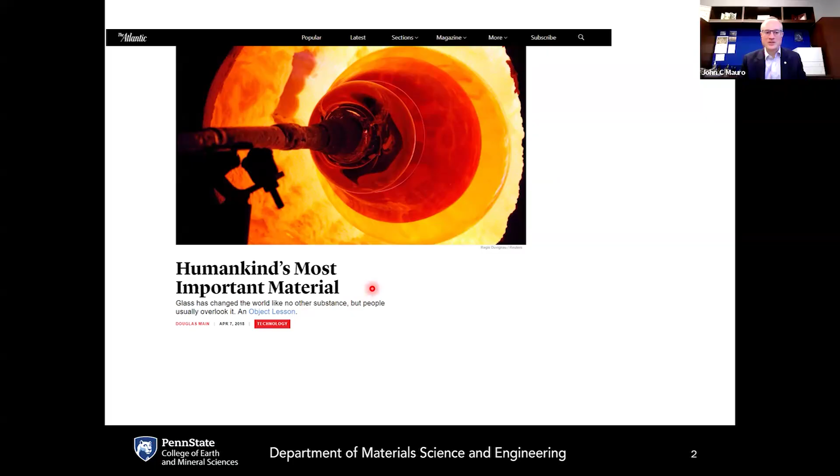Glass is often a material we don't think too much about because it's something we look through rather than look at. I was delighted a few years ago, in 2015, when The Atlantic published an article calling glass humankind's most important material, saying glass has changed the world like no other substance, but people usually overlook it. More recently, in 2024, the cover of National Geographic declared this the glass age, making the case for how cutting-edge glass technology is helping reshape this ancient material for our future. People tend to think of glass as an old material because it's been made for thousands of years.

But if you look at the glass around you and see all the ways it has helped facilitate modern civilization, there are so many aspects of glass that touch our lives every day. One of the most basic is glass windows for architecture, whether homes or office buildings. This material lets in outside light while providing a good thermal barrier between inside and outside, along with good corrosion resistance against water and acid rain, doing this cheaply and over many decades without issues.

There are also glass lenses invented hundreds of years ago. Most of us wear corrective lenses of some sort, and glass technology was key to making that possible. There are also glass lenses used in tools of scientific discovery. Before glass lenses for telescopes, astronomy was done by the naked eye, and telescopes made possible by glass technology were a huge step forward for the entire field. Glass lenses for microscopes were essential for microbiology and the discovery of microorganisms, revealing a whole world of unicellular life responsible for diseases, enabling the whole field of epidemiology. This was all made possible by glass.

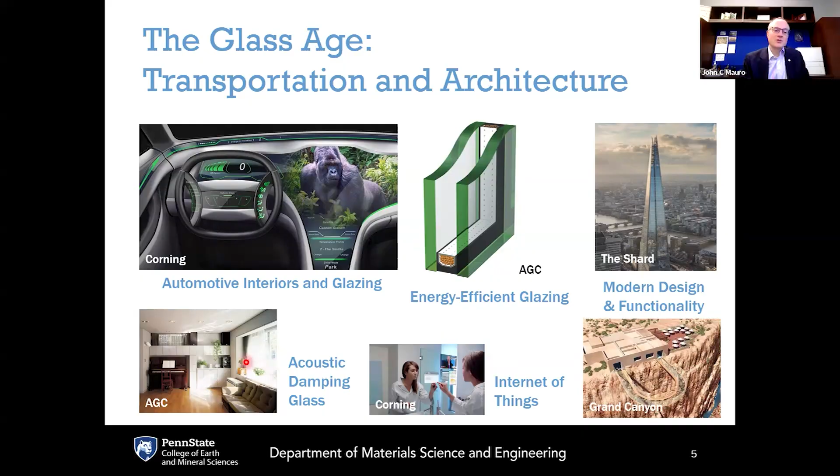There's also new glass technologies being used for modern design and functionality, whether it is the Shard in London, this glass bridge you can walk over the Grand Canyon if you are brave enough, glasses being used to help enable internet connectivity in devices and appliances around your house, and also acoustic damping glasses to help attenuate sound. When it comes to energy, glass plays a really key role in enabling the next generation of renewable energy.

Windmill turbines become more efficient with larger turbines, and these are fiberglass reinforced composites. So in order to enable more efficient wind energy generation, new generations of fiberglass need to be developed with higher values of Young's modulus to get higher stiffnesses to enable these larger turbines. Companies like Owens Corning are investing a lot in these next generation fiberglass technologies for wind energy.

Then there is solar energy generation. Glasses are used as substrates for photovoltaics. We just installed a bunch of panels on our house, so we're making good use of those as well. There's also glass technologies for solar thermal energy, where you've got parabolic mirrors that focus light on a glass tube that has a polymer inside that converts to a liquid when heated up from the solar radiation. This converts solar energy into thermal energy and then into electricity.

Then there's also glass tubing that is used for photobioreactors, where we take advantage of the natural photosynthesis process to convert solar energy into chemical energy. So there's all kinds of ways that glass is helping to enable this next generation of clean energy generation.

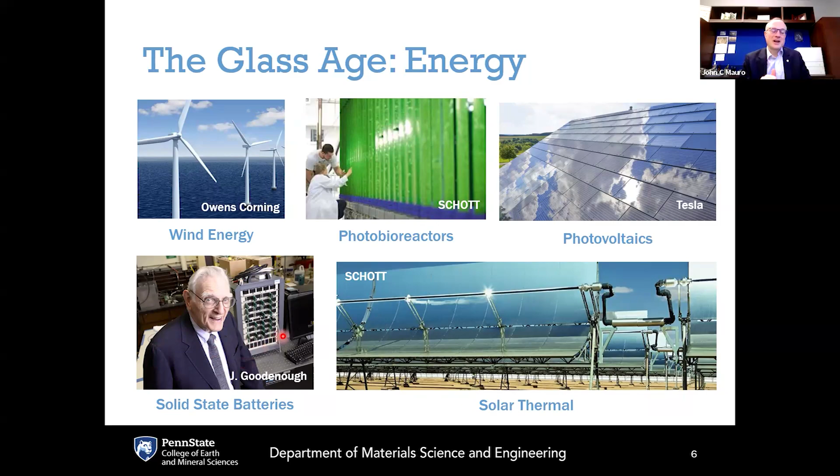Glasses are also used for energy storage. John Goodenough, who unfortunately passed away recently, was very active in the lab up until his final year, and he was inventing new glass-based technologies for next generation batteries that would go beyond his Nobel Prize winning invention and offer higher density energy storage, safer energy storage, and greater cyclability.

Then there's glasses for healthcare. Glasses are used for vaccines, and for medicines, like the EpiPen, from a company my advisor has. Out of Alfred University, he's got a company that does ion exchange strengthening of glass, and this is used for patients who have bee allergies or other allergies. This glass needs to be able to withstand high stresses, so patients can inject themselves with life-saving medicine if needed.

Then there are glasses that have silver ion exchange into the surfaces, and silver is a known antimicrobial agent, and this helps to prevent the spread of diseases, like if you've got shared touch screens used in hospitals or ATMs. And then there are bioactive glasses that actually get embedded in the body.

Some of the early bioactive glasses developed by Larry Hench and then Mohammed Rahaman are used for helping to stimulate natural bone tissue repair and tooth repair. More recently, Steve Jung and Delbert Day, who's also a Penn State grad and now at Missouri, have developed glass fibers being used to help enable soft tissue repair.

This is useful especially for diabetic patients, many of whom have open ulcers that just do not heal for many months, and these ulcers can be as deep as going down to the bone. With this new glass fiber technology, these glass fibers get packed into the ulcers, and they dissolve over the course of a few days.

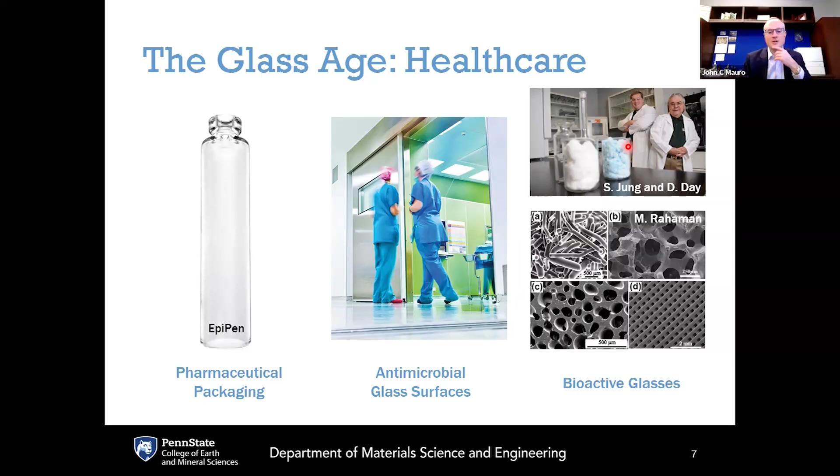Now, as scientists and engineers, we tend to think about materials in terms of what useful things they can do for us from an engineering perspective. It's often easy and unfortunate to overlook the impact they have on our society through their culture and through their use as an artistic medium.

Glass has been a favorite artistic medium for humankind for thousands of years, dating back to glass beads in Egypt and Mesopotamia. What we're looking at here are the beautiful, famous stained glass windows from Sainte-Chapelle in Paris. These are about 800 years old, and glass was chosen by King Louis, better known now as Saint Louis, as the medium for building this beautiful chapel meant to house the crown of thorns from Jesus.

King Louis had purchased the crown of thorns from the Eastern Roman Empire in Constantinople when they were in trouble, and transferred it to France, then built this chapel to house it. Each one of these beautiful stained glass windows tells a very detailed story from one of the books of the Bible. If you go inside Sainte-Chapelle, it's like being inside this beautiful work of art with so much detail, so much color, and the natural sunlight coming in just has this wonderful effect.

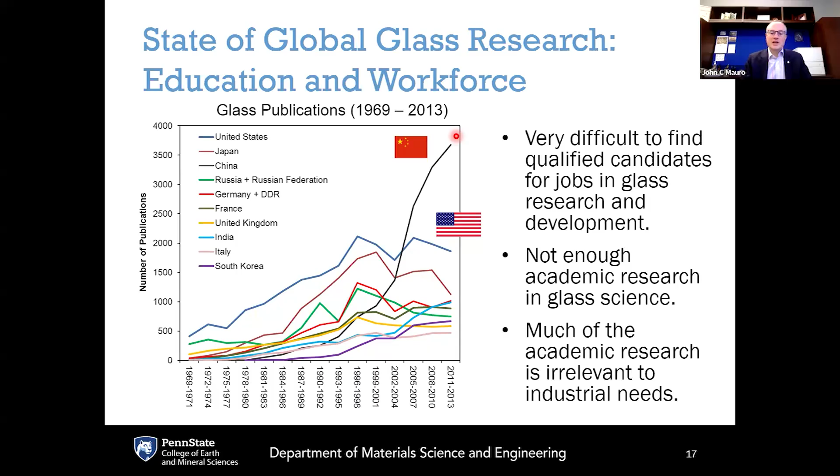Then one day I found out that Carlo Pantano, the glass professor here at Penn State, was retiring. My now former boss at Corning told me I took the problem a little bit too seriously when I quit my job at Corning and came here to Penn State to be the next glass professor.

So I've been here now for 9 years, and it has been a wonderful move. We've just found the perfect place really to do glass science, and just a wonderful community at all levels, whether it's the department, the college, the university, or the Happy Valley community.

This young lady here, Sophia, she was 11 when we moved, and she is now a second year student at Penn State doing a triple degree. She's majoring in material science and engineering, English, and music.

We very quickly built the largest academic glass group at Penn State. I made the case that there's a really strong demand for research in glass that is being unmet by the supply at US universities, and I turned out to be right. So I was able to very quickly build up the largest program here in the country in glass science.

What was really satisfying for me is two of my PhD graduates actually became professors at my alma mater, Alfred University, and they organized a conference there a couple of summers ago called the University Conference on Glass. I was able to bring a big chunk of my group back to my hometown of Alfred, New York, so they could see my hometown and attend a conference organized by a couple of my alumni.

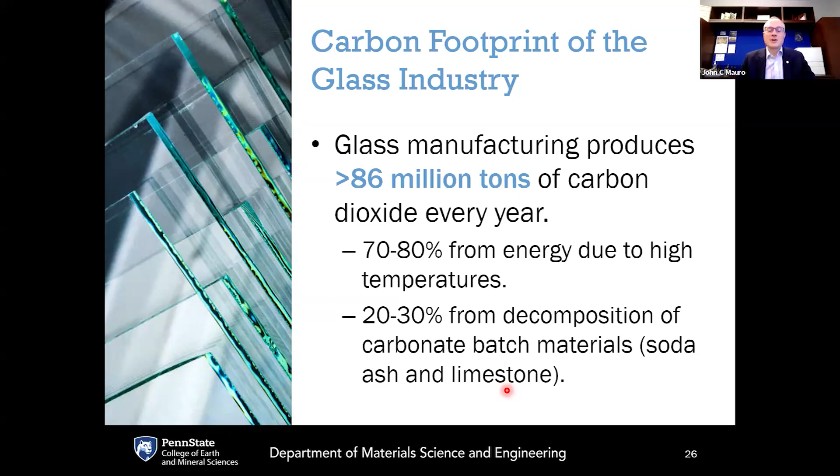So we found ourselves here at Penn State in a rather unique situation, with me having my extensive background in industrial glasses, including commercialization of glasses, also having all the equipment here and students who are eager to make a difference. So we decided to try to take a stab at this problem, and what we came up with is what we're calling Lion Glass. It's called that because it's named after Penn State's mascot, the Nittany Lion. You'll see our Nittany Lion here on the shield in the lower left-hand corner. So that's where the name comes from, plus all the best glasses are named after animals, as we know.

What does Lion Glass do? This is a completely different family of glass chemistry. It's actually a phosphate-based glass instead of a silicate-based glass. It reduces the melting and forming temperatures by about 400 degrees C. It also completely eliminates the use of carbonate batch materials, greatly reducing energy costs and carbon footprint.

The contribution from energy consumption is greatly reduced because of the significantly lower melting temperatures, by about 400 degrees C. Another cool thing is that the strength of the glass, the retained strength after damage, is quite a bit higher.

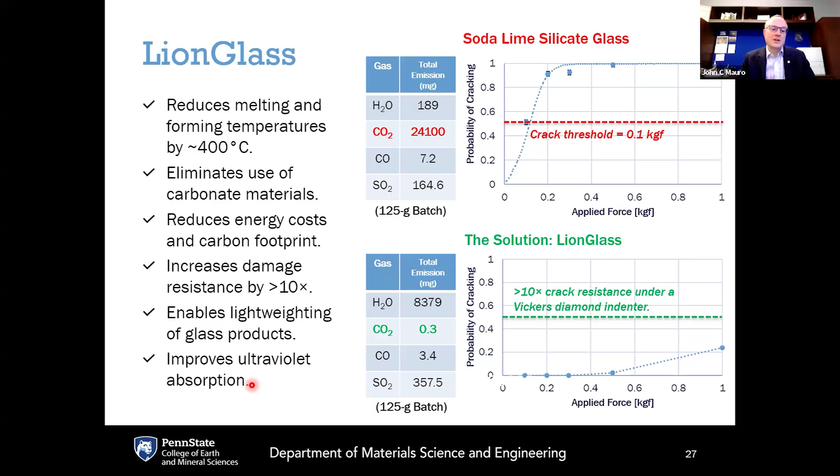One final advantage of Lion Glass is that it shifts the UV absorption edge a little bit towards the visible, so it actually improves ultraviolet absorption. If you're using the glass for packaging anything sensitive to UV degradation, like cosmetics or some beverages, there can be some additional benefit there.

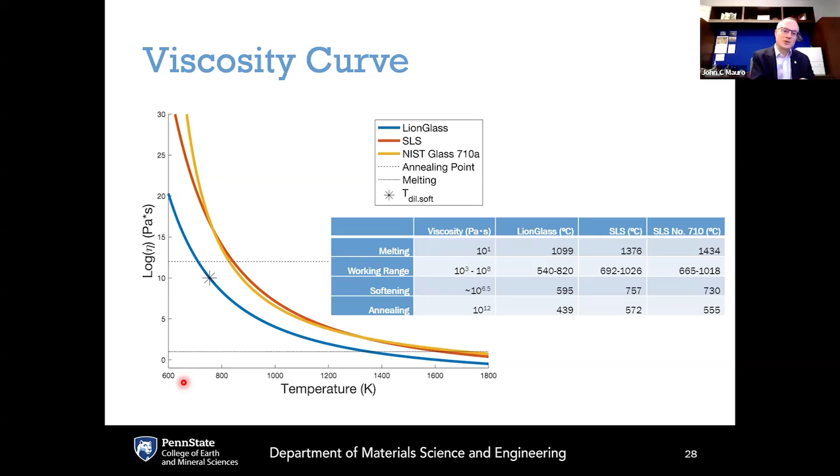Every part of industrial glass manufacturing is not really controlled by temperature, it's controlled by viscosity—how fast the molten glass is flowing. Every stage of industrial glass manufacturing is controlled by the glass flowing at a particular rate. So in moving from soda lime to Lion Glass, what we want to do is maintain the same viscosities that are used now, but just shift the temperatures lower in order to match the same viscosities.

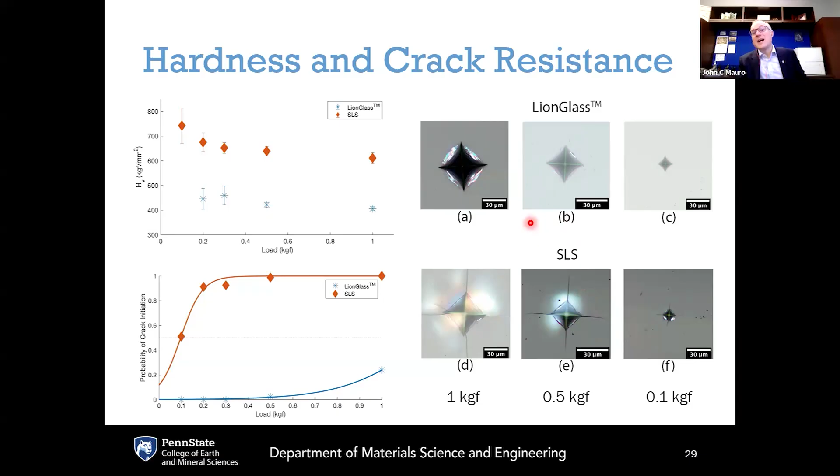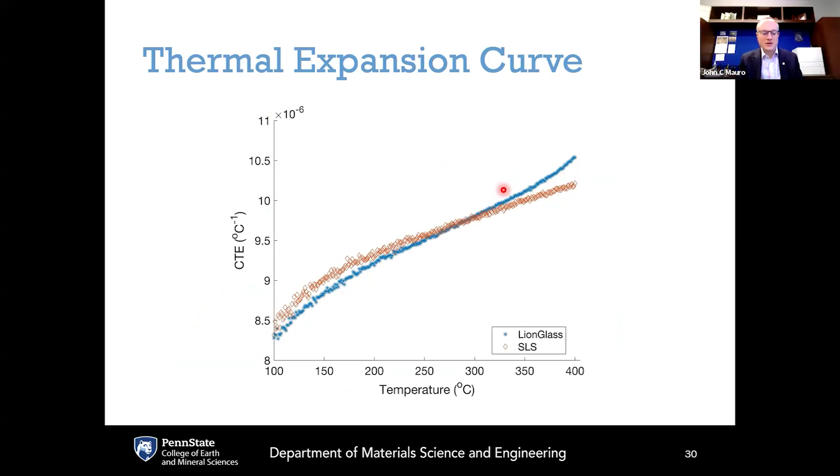What about thermal expansion coefficient? The CTE is actually very similar between Lion Glass and soda lime silicate, so there's no difference in terms of the thermal shock performance.

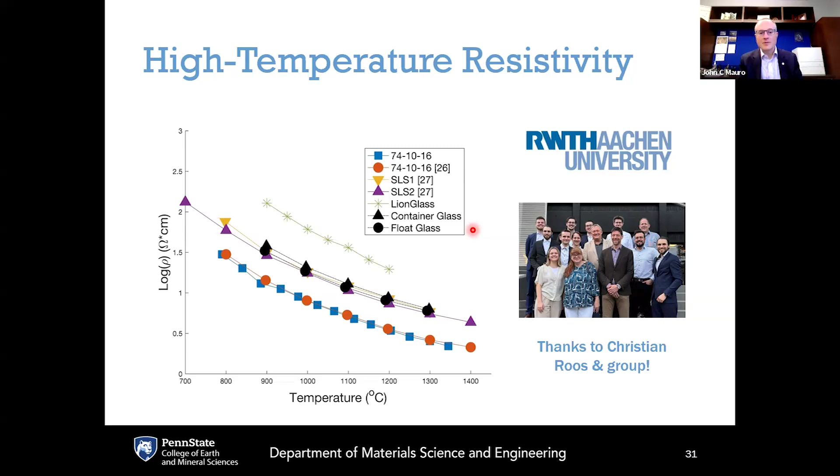Another big trend in glass manufacturing is the move away from fossil fuels and towards electrically resistive glass melters. Working with our collaborators at Aachen University in Germany, we showed that the electrical resistivity, which needs to be in a certain range to enable glass melting, is also in a good space for electrical melting.

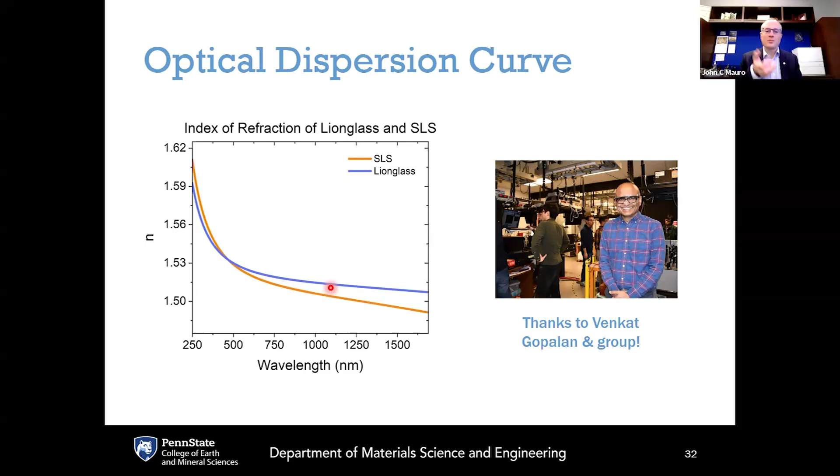What if you just look at Lion Glass—can you tell the difference just by looking at it? The refractive index profile is very similar between Lion Glass and soda lime, so there's no difference there. The one thing you might notice is that Lion Glass is clearer. If you look at soda lime, it's got a little bit of a greenish tint, which comes from iron contamination. With Lion Glass, it's actually a lot more resistant to coloration, so it gives more of a pure, perfectly clear color as opposed to this greenish tint.

They're forming lower melting temperature eutectics. Gases are being released as the carbonates decompose into oxides. And as this ramps up to 1100 degrees C, the reaction kinetics get faster and faster.

The SO2 blisters are just because sodium sulfate is being used as a fining agent. This helps to make larger bubbles so they can get out of the melt faster.

By the time you get to 1400 degrees C, you've got this foaming behavior that starts as the fining agent releases sulfate blisters. You get this foaming, and then as you get to 1500 degrees C, the foam calms down, the fining process is completing, and you get a nice homogeneous melt that is bubble free. But it really does take those high temperatures to make this happen.

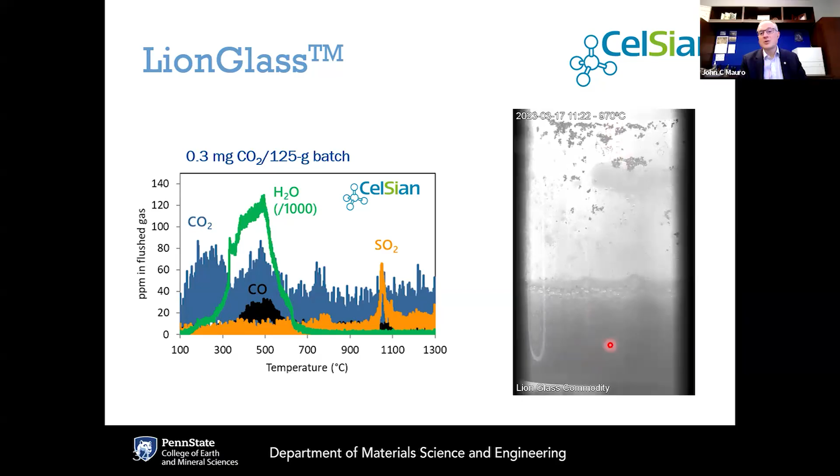As we get to 950 degrees C, everything's calmed down. So 950 is a lot like 1500. You get a nice homogeneous melt here at about 500 degrees less in this particular case.

We've got three industrial partnerships already with LionGlass. It's generated a lot of interest. Our first partner comes from Italy, Bormioli Luigi. They make high-end tableware and also cosmetics packaging. We are in the second year of partnership with them, and they've indicated they would like to continue with us going forward. They are making glasses for cosmetics packaging.

I'm actually learning quite a bit about cosmetics that I never knew before. I never had the need to know. Chanel has told us explicitly that they would like the next generation of Chanel No. 5 to be packaged in LionGlass, so we are doing our best to make this possible.

We had a pilot scale trial, actually a couple of pilot scale trials over in Italy. This first one took place in Murano, and that is very poetic for me, because if you know anything about the history of glass, you know the importance of Venetian glass and the island of Murano. The medieval glassmakers kept burning down Venice, so they were forced onto this island off the coast of Venice, Murano, which is still the center of Venetian glass manufacturing and glass making.

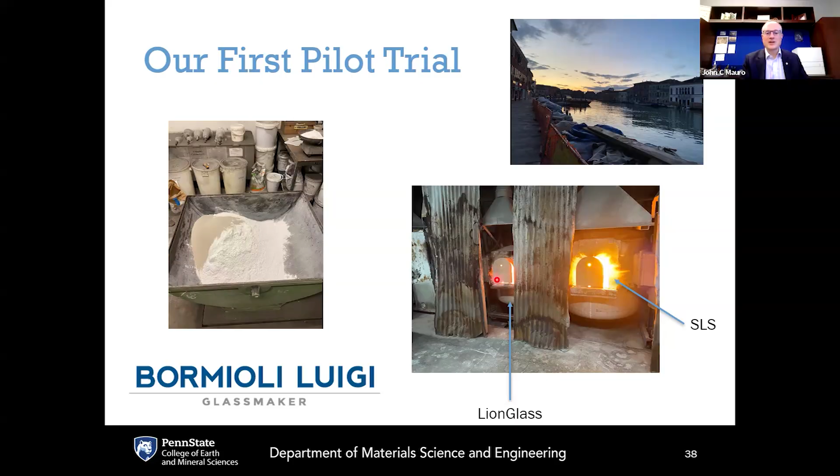So if you go to Venice, make sure you go to Murano so you can check out all the cool glass stuff there. In this trial, you can see the side-by-side furnaces. The furnace on the right is soda lime, the furnace on the left is LionGlass. You can see just what a lower temperature we have with LionGlass.

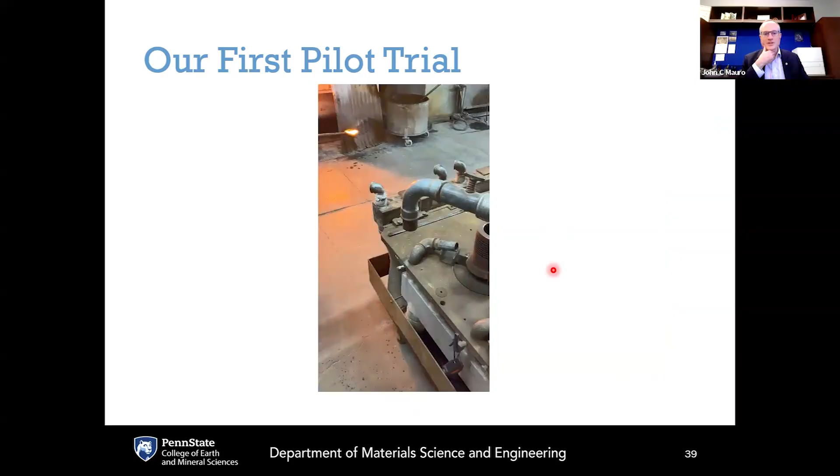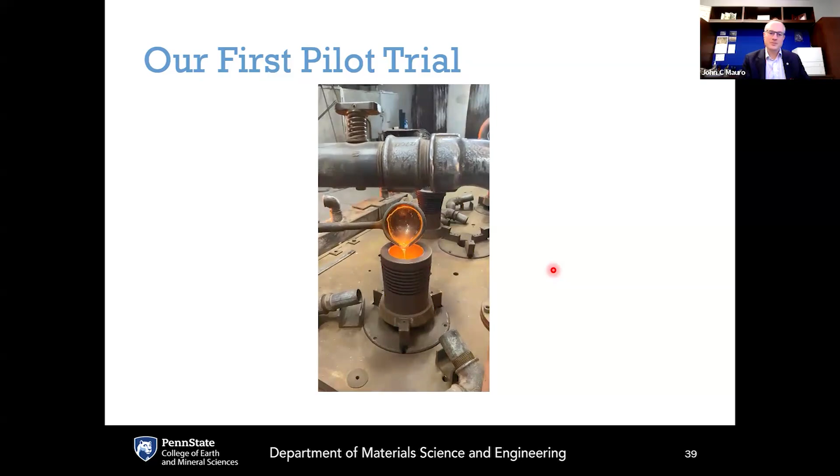This will show a movie of making the first LionGlass cup. We're ladling the molten LionGlass into this mold, and the mold is being spun using a foot pedal. There's a technician there with a foot pedal, and the faster he presses it, the faster it spins around as the molten glass is poured in.

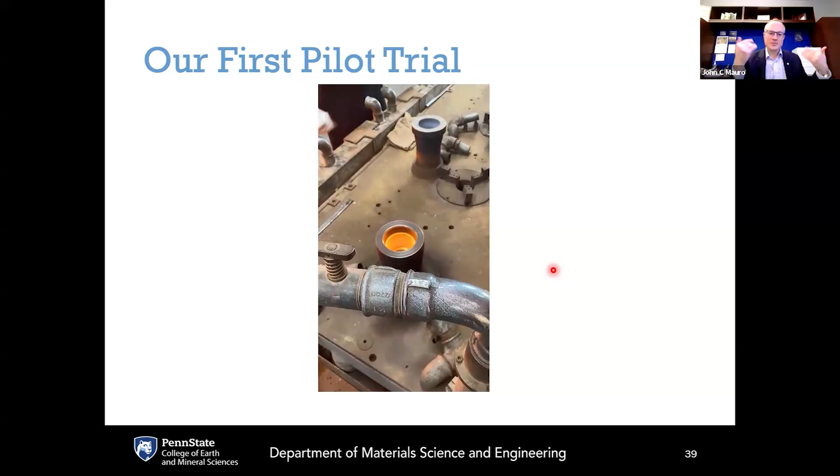As the mold spins faster, the glass creeps up the sides due to centrifugal force. As it creeps up, the temperature goes down, the viscosity goes up, and it's able to retain its shape. Now some cold air is being blown onto it. You can see it cooling down, and it will slow down a bit as it continues to cool. Eventually, once he stops pressing the foot pedal, the mold retracts.

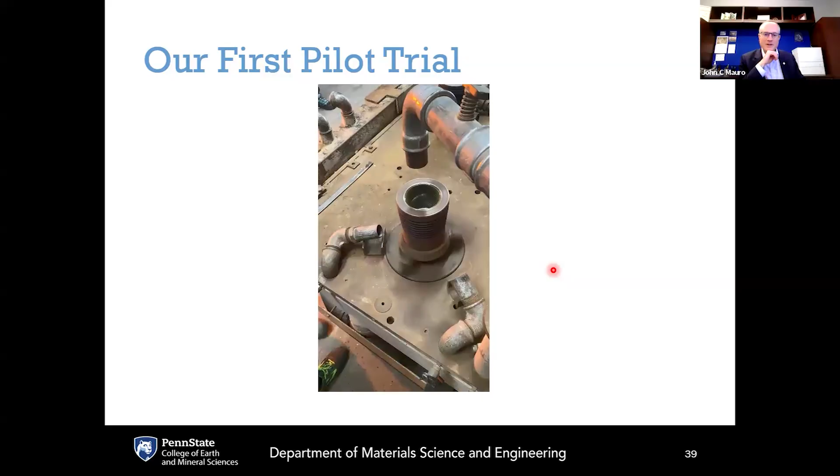So it goes into the plane of the table, and out pops the very first LionGlass cup. And here it comes. Yay, there it is. Here's a close-up of it. We made a whole bunch of cups.

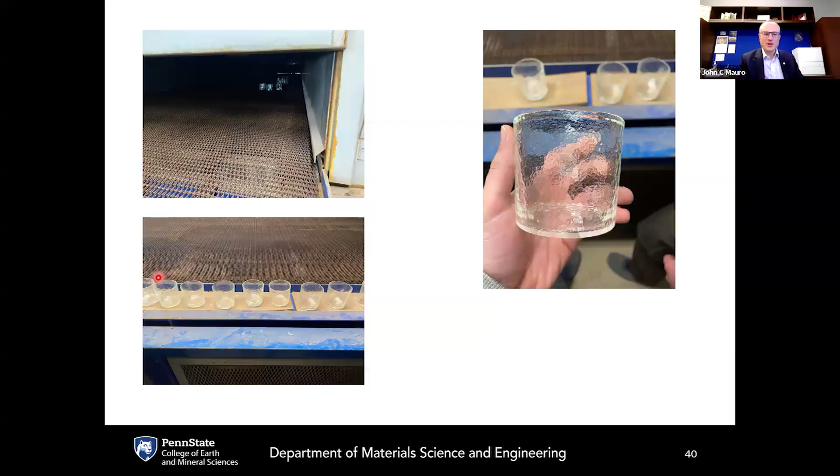Vitro's U.S. headquarters is in Pittsburgh. This is the flat glass part of PPG, Pittsburgh Plate Glass, that was purchased by this Mexican company, Vitro, but we're working with their U.S.-based headquarters in Pittsburgh. This is really cool for a number of reasons. One is that working with a Pittsburgh-based company is in line with Penn State's land grant mission to serve the Commonwealth of Pennsylvania. Also, the student working on this is a former student of Carlo Pantano's who got his bachelor's and master's degree here at Penn State. Now Vitro's sending him back to get his PhD.

The other cool thing is that we're working on the float compatibility of LionGlass for architectural applications - are we able to float molten LionGlass on top of molten tin the same way soda lime is done now, and make these really large sheets of glass for architectural applications? This is the single biggest market for glass, and everything looks pretty promising right now.

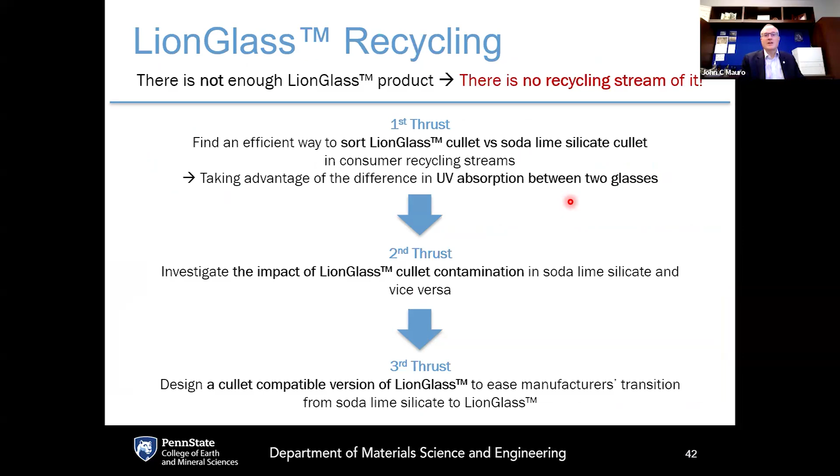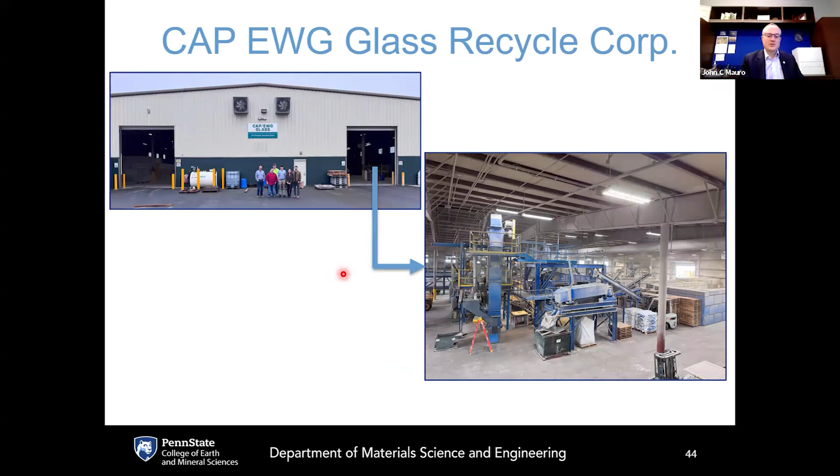One of my students is working together with the Pennsylvania Recycling Markets Center, based at Penn State Harrisburg, and they've connected us with a lot of recycling facilities. My team went to visit recycling facilities around the tri-state area, and what we learned is that there is X-ray fluorescence equipment that is used to sort materials. Here's some of my team at these recycling centers.

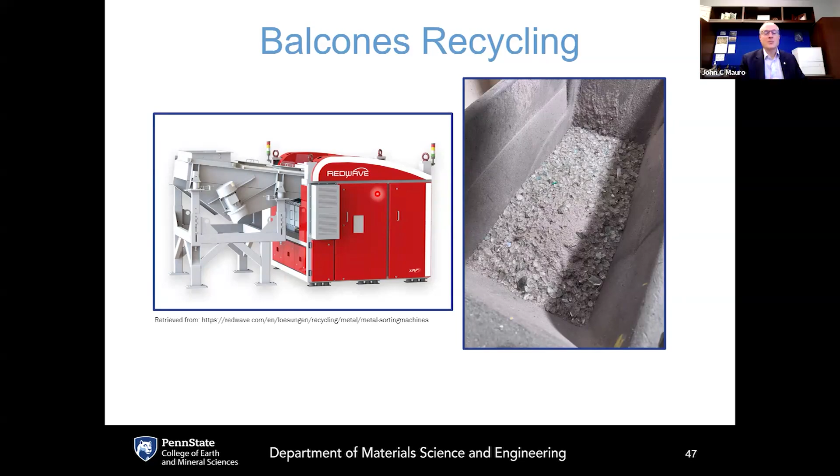Right now it's used to sort out lead silicate, the so-called lead crystal, which is not crystal at all, it's glass. It's very important that lead not go into the cullet stream for soda lime manufacturing, so XRF is used to detect the presence or absence of lead and sort it out. The equipment they use is from an Austrian company called REDWAVE. We actually have a partnership with them as well, where we are developing the XRF standards so they can update their software, and the existing equipment with the appropriate software upgrade could be used to sort LionGlass and separate out the recycling streams between soda lime and LionGlass.

So that is all in progress.